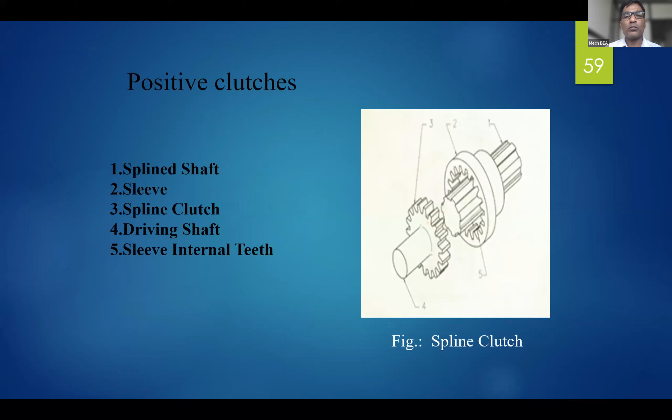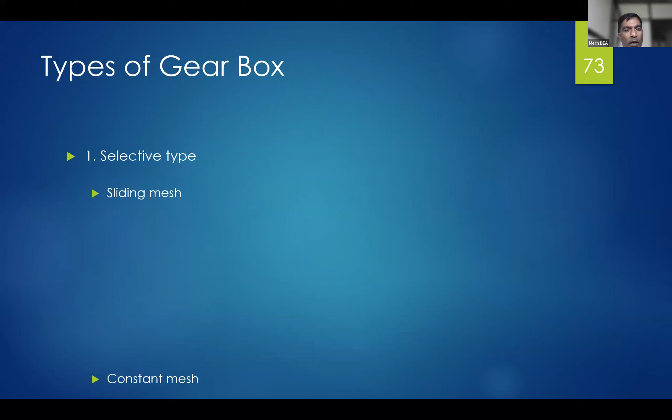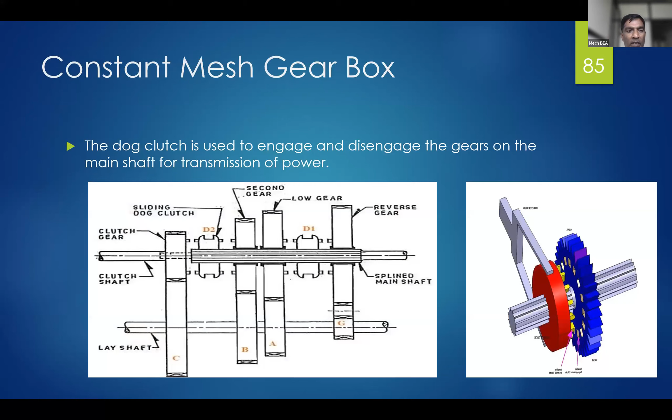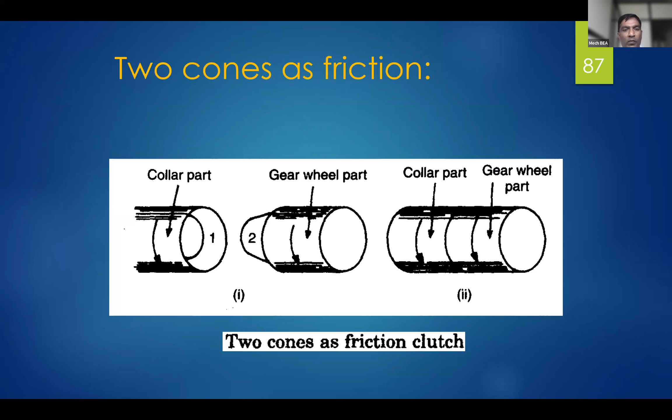So, we are going to see the remaining part of this unit. First of all, I will revise some of the part. We have seen types of gearbox: sliding mesh, then constant mesh, and constant mesh with synchronizer, that is nothing but the synchromesh gearbox. This already we have seen.

Then the next part that we have started is the overdrive. With respect to overdrive, we have seen how it is constructed and what is overdrive. It is a device in an automobile which is connected in between the gearbox and the propeller shaft to provide an additional speed for the propeller shaft.

With the help of an epicyclic gear train, it is possible to fix one of the elements in the epicyclic gear train, which is in the form of sun and planet gear in the overdrive. We can have overdrive by rotating the output shaft more than the speed of the input shaft to this whole assembly. So that is nothing but the overdrive.

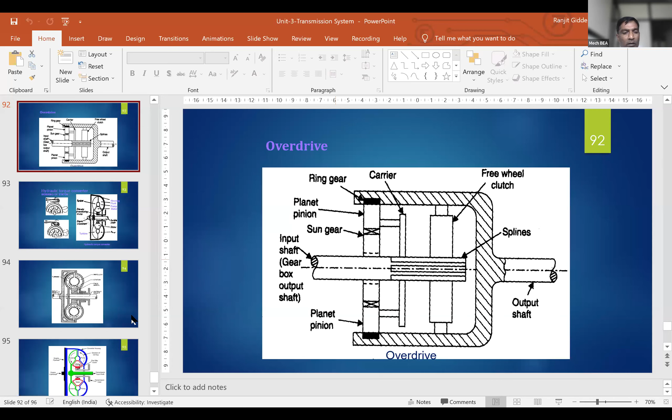In theory of machines, we have seen the epicyclic gear train. So I will take one extra slide to give an idea about how we can rotate the output shaft with a speed more than the input shaft.

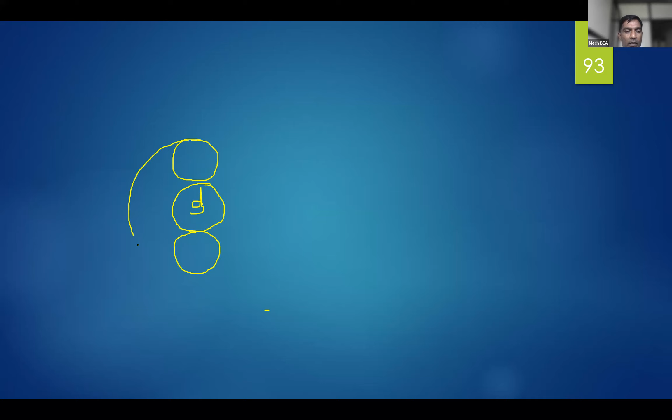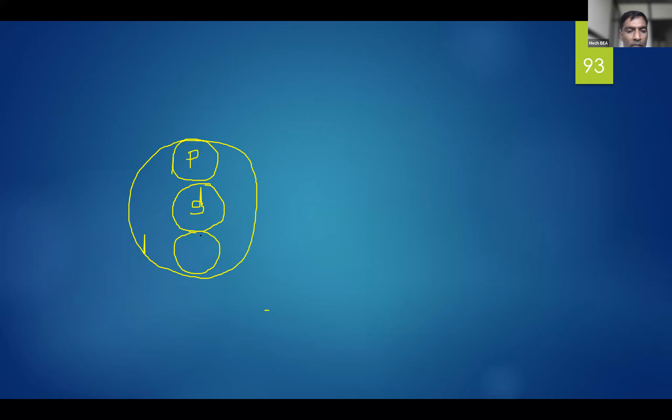So this is the sun and planet gear, epicyclic gear train. This combination we are going to check. The sun gear is mounted on the input shaft, and the sun gear is in mesh with the planet pinions, maybe 3, maybe 4, and those are mounted on the carrier. This arrangement is provided like this.

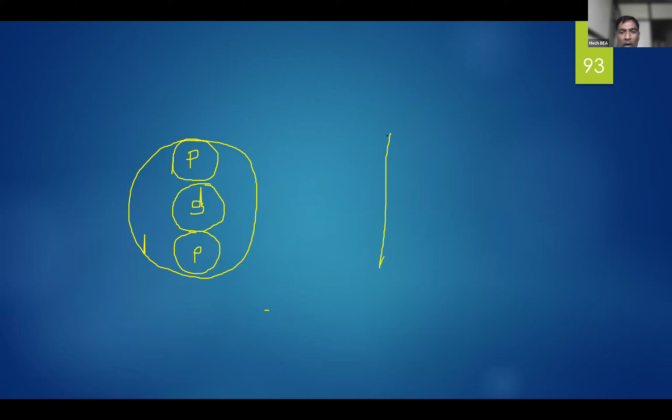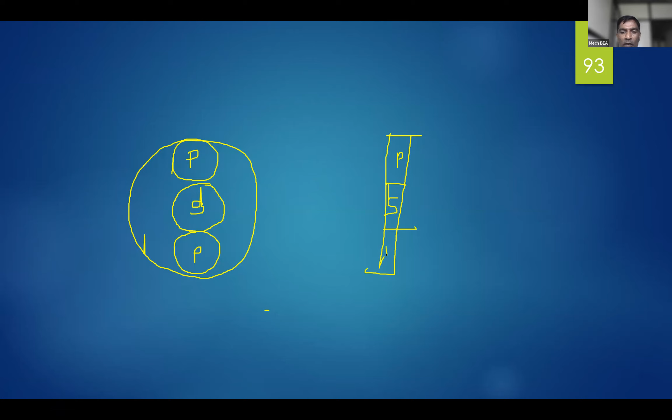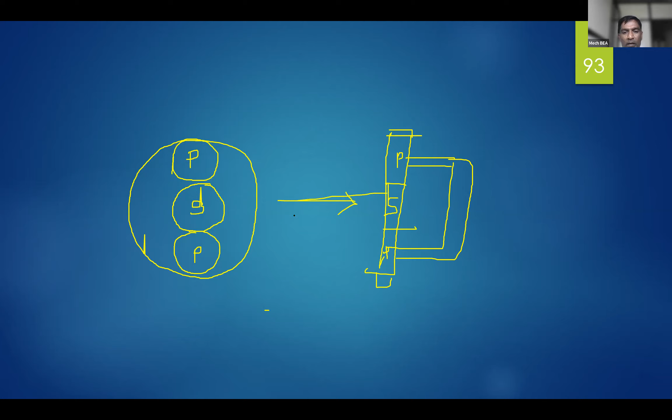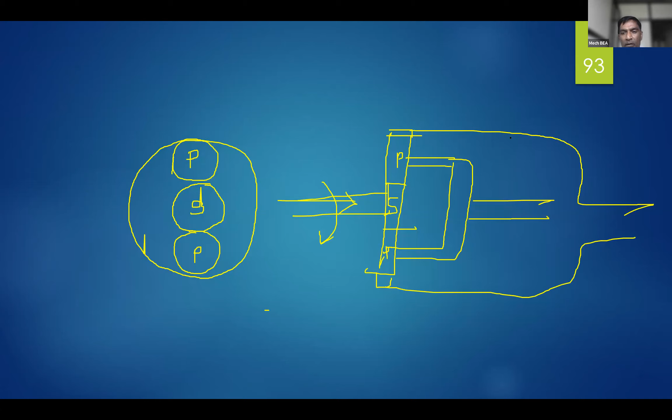In the side view, as we need to see how speed is increased, we need to go in detail with respect to this overdrive. This one is the arm, or we can call it the planet carrier. Now you can relate this diagram. Here is the input shaft, and the output shaft is connected to this casing. Here another arrangement, a free wheel, is provided. The input shaft is connected to the sun gear.

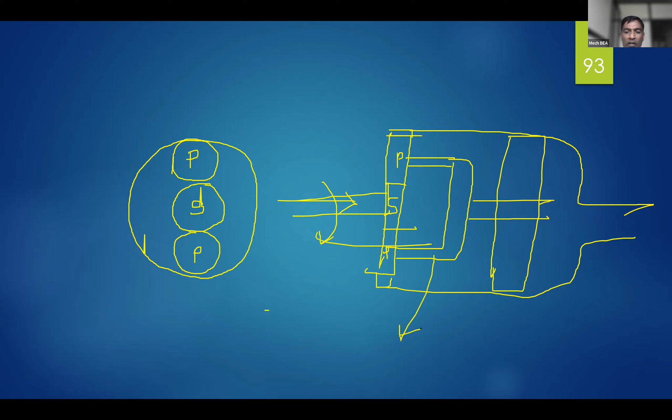Now, when this ring gear is going to rotate: generally while dealing with numericals on the epicyclic gear train, we have seen the arm is fixed. Like that, you should consider this one as the arm, and accordingly we have made the table of motion. This we can call the A gear. I will write here A, and here it is R. Already we have seen these types of numericals.

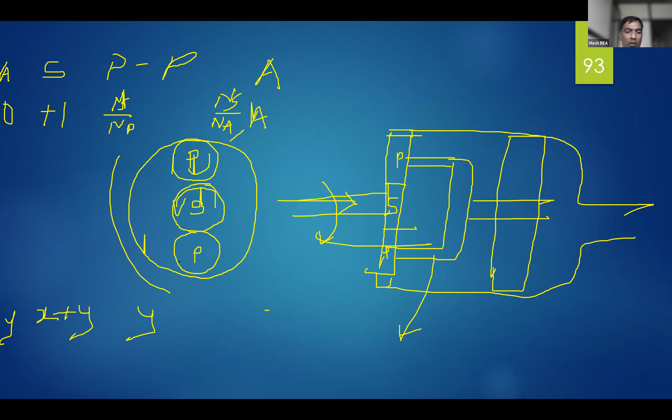Here NS upon NP, and here NS upon NA. Like this we get the first row, and finally we add Y as a rotation for the arm, and we get X plus Y. I am writing directly Y. If this is rotating anti-clockwise, this will rotate clockwise. So Y minus X NS upon NP, and for this Y minus X NS upon NA. This is internal meshing, so whatever direction of rotation of P, the same will be given to A.

Now, for one revolution of the sun gear, what will be the revolution of the ring gear? If for one revolution of the sun gear the ring gear has more rotation, then we say it is overdrive. That is, if the input shaft has 100 RPM and this rotates with more than 100 RPM, we call it overdrive. The principle of superposition is used as per the requirement. Either the casing is keyed or the arm can be fixed; there are different drive modes. Through this we obtain a speed, which we call overdrive with respect to input to output speed.

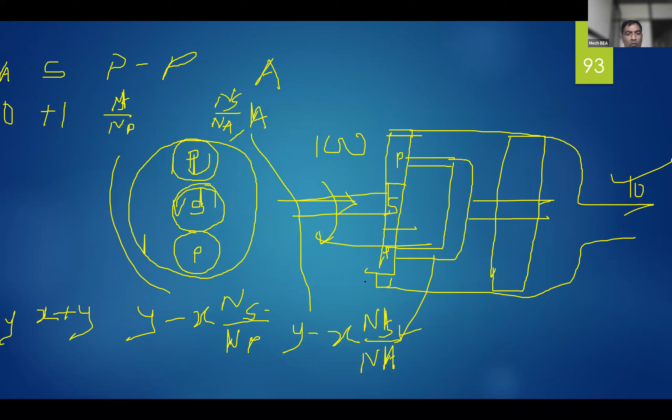So like this overdrive works, and it is provided on automatic transmission vehicles, wherein we can have cruise control or better fuel economy. So this is about one of the devices.

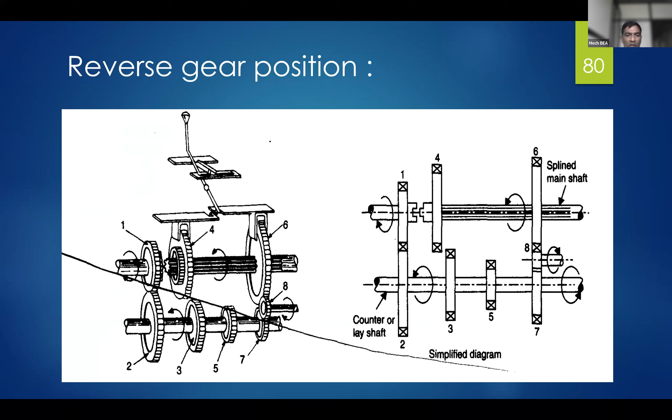Then the next important component of the automatic transmission system. Generally we have seen there is the manual transmission system and the automatic transmission system. Once again I will show that summary regarding the manual transmission system and the automatic transmission system.

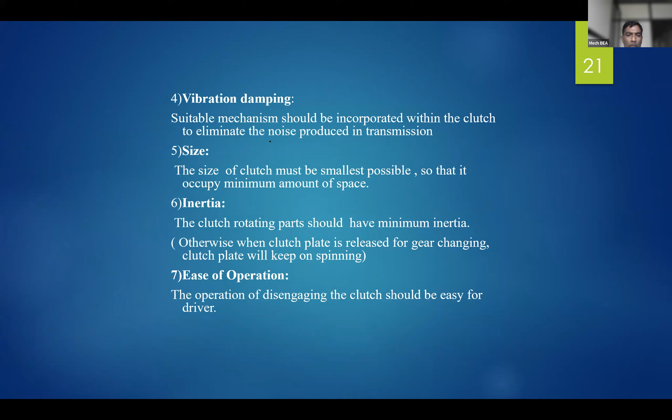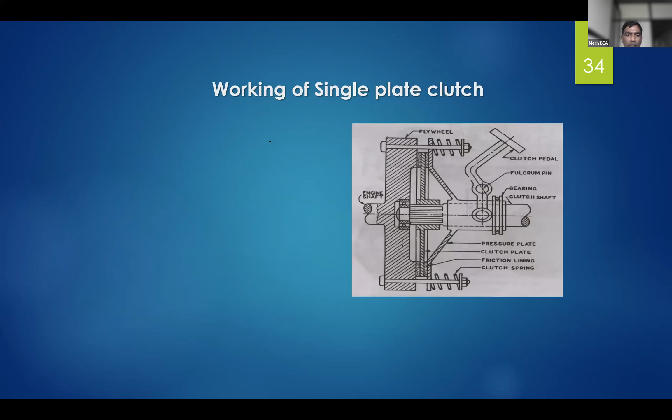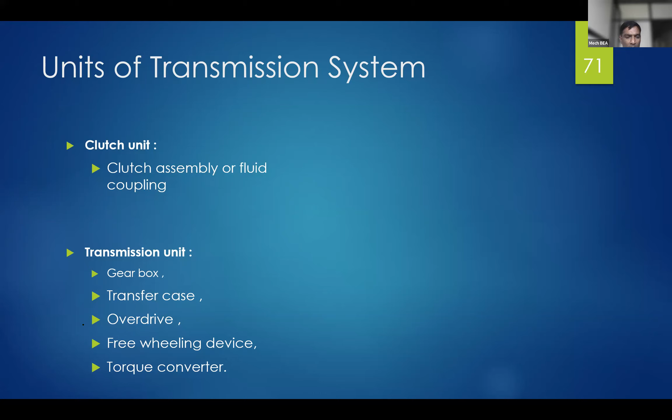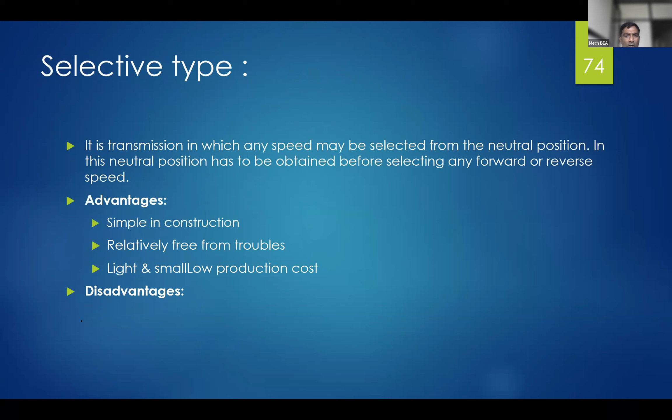So these are the units of the transmission system. Clutch is always required. In the manual transmission there is a clutch assembly. In automatic transmission there is fluid coupling. Again, in the manual transmission there is a gearbox, and in automatic transmission there is a torque converter. These are the additional elements required for both transmissions. Based on which transmission system is used, one or two elements are going to vary. Now you can see the image displayed on the screen, related to the hydraulic torque converter.

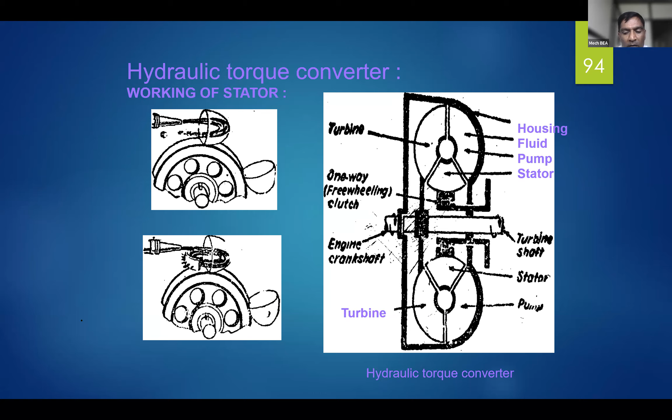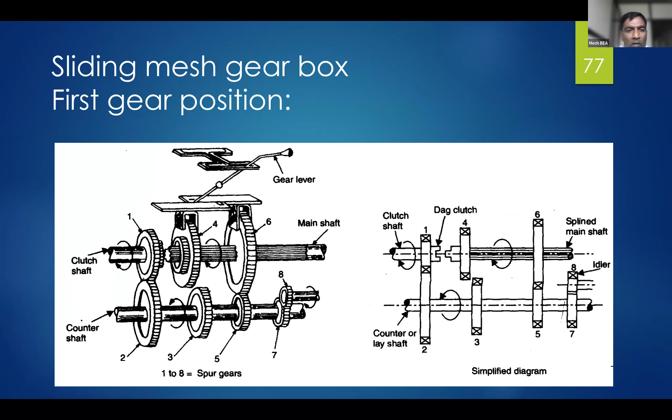Previously we have seen fluid coupling. On the similar ground it is also working, but in addition to that, one more element is provided, and that element is called the stator, which can be used to guide the oil. So you can see this, this is the torque converter.

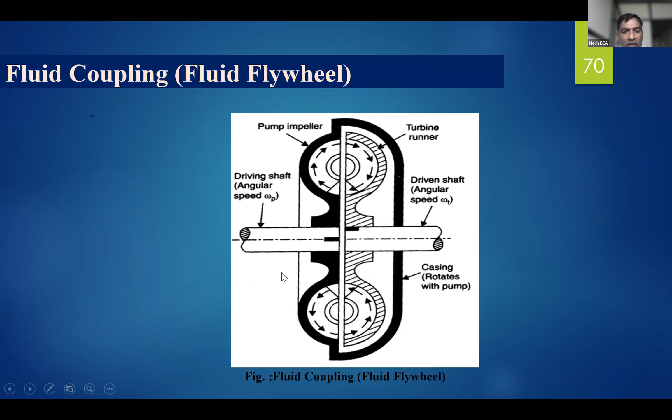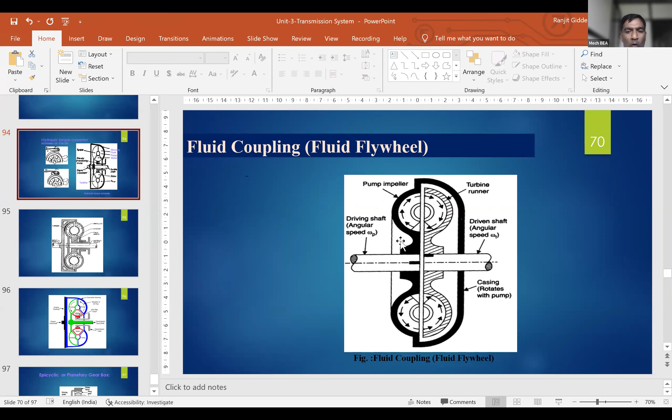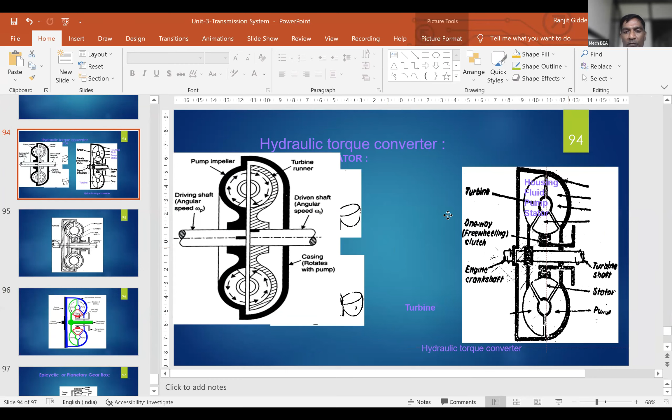I will put this figure on the same slide so that you will get an idea about the difference between the fluid coupling and the torque converter. My voice is audible? Somebody should respond.

Yes sir, okay. So this is fluid coupling, and here is another device which is part of automatic transmission, called the torque converter. That means there is multiplication of torque, and because of this multiplication we can have larger torque, which will fulfill the requirement of the transmission system.

This left hand side image is related to the fluid coupling. Whatever working the clutch does, the same connection and disconnection is done by this device in the form of fluid coupling, wherein there are two parts: one is the pump impeller and another is the turbine runner. This pump impeller is part of the casing. So for the fluid coupling there are two parts.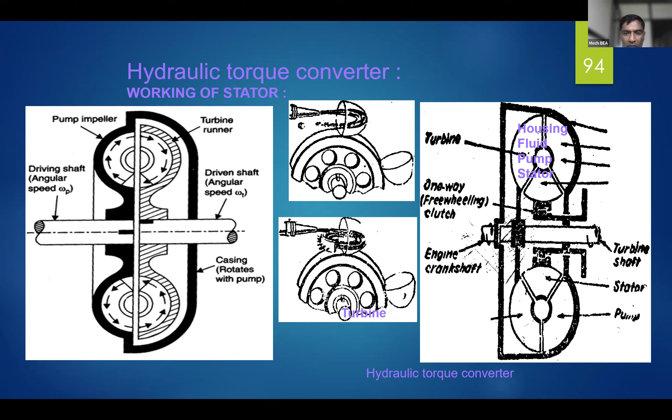So this is an element which is used in the automatic transmission system.

Here is one more figure you can check. So here this is the impeller, this one is the stator element, this is part of impeller, and this one is the turbine. So this is input shaft, this one is output shaft. Aim is to connect this input to this output shaft.

How to connect? With the help of the fluid, which is provided inside this impeller. So because of the flow of fluid, it will rotate this turbine, and after rotation, whatever fluid is remaining, again it is guided and provided to the impeller via this stator. So like this all the time.

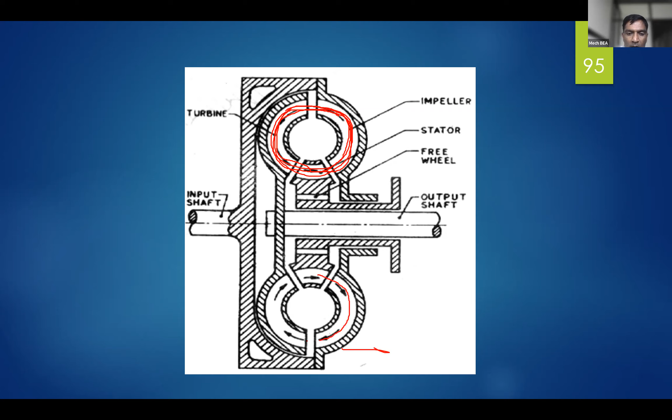As soon as the accelerator works, it will multiply the torque like this, and this will rotate the output shaft. So the function of this stator is to guide the flow, which will help the turbine to get more speed.

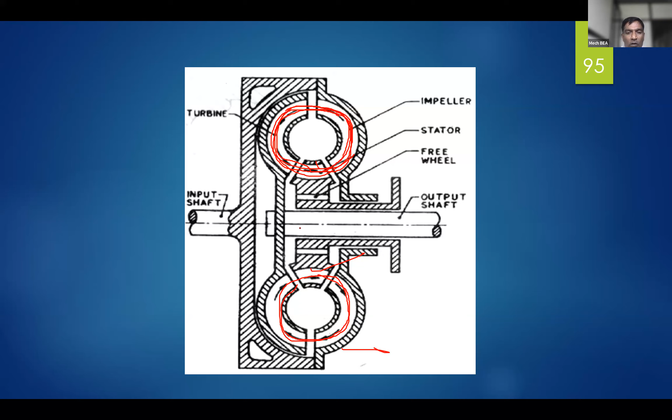So this is about the torque converter. In the fluid coupling, there are two components, and in case of the torque converter, there are three components. Additionally, one stator unit is provided, so that it will multiply the torque. Simply, this torque converter is also called a torque multiplier.

So instead of a gearbox - a gearbox is required to vary the torque as per the requirement. So the torque converter is also required to vary the torque. So in automatic transmission, this torque converter is there.

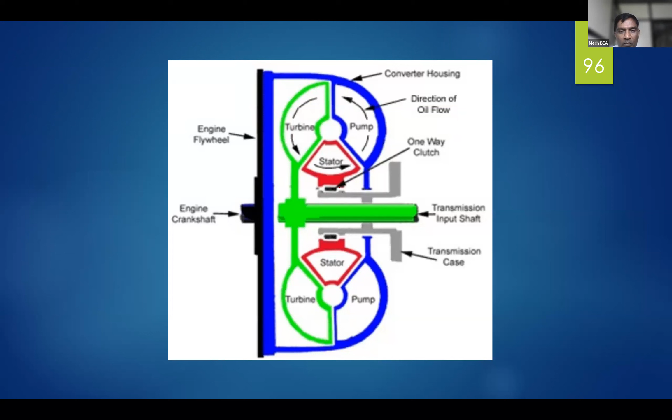Okay. Then the next component of the automatic transmission system is nothing but the epicyclic or planetary gearbox. So whatever way we have seen that overdrive, the same thing you can take as an example of epicyclic gear train or gear set.

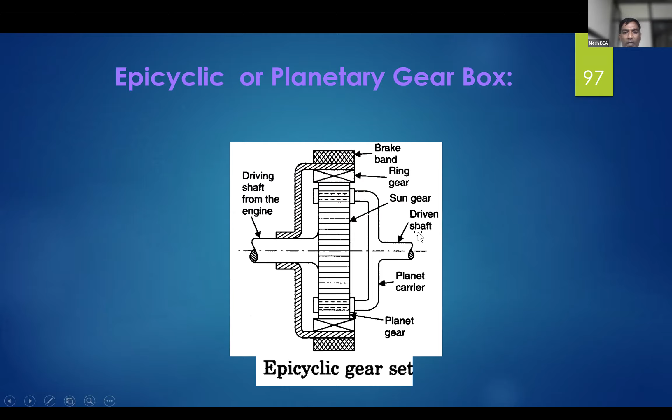So in the automatic transmission, such sets are provided, based on the requirement of how many speeds we need to provide for a particular vehicle. So this is one combination.

So we can eliminate this part, and this is for one ratio, this is for another ratio, and 3, 4, 5 like this. So this combination - for one speed, there is a combination of sun gear, planet gear, and ring gear.

And what you are observing, this one is the brake band. So in the epicyclic gear train, either for tabulating the data we fix the casing or the ring gear is fixed. But in actual practice, as per the requirement of speed, one of the gears we are fixing. So here, to fix the ring gear, a brake band is required. Again, the sun gear can be fixed to the casing, but the ring gear can be fixed by providing the brake band.

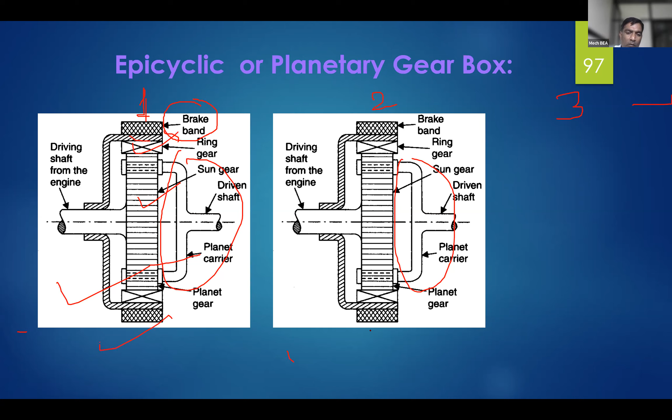So this brake band is provided to fix the ring gear, and accordingly we can get the speed. So such combinations are provided in the automatic transmission, and that will give various speeds.

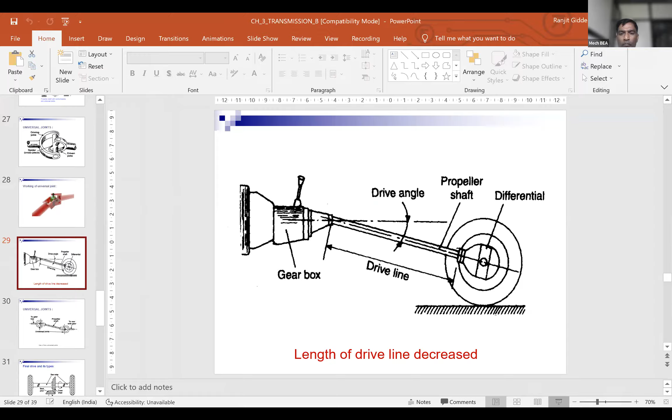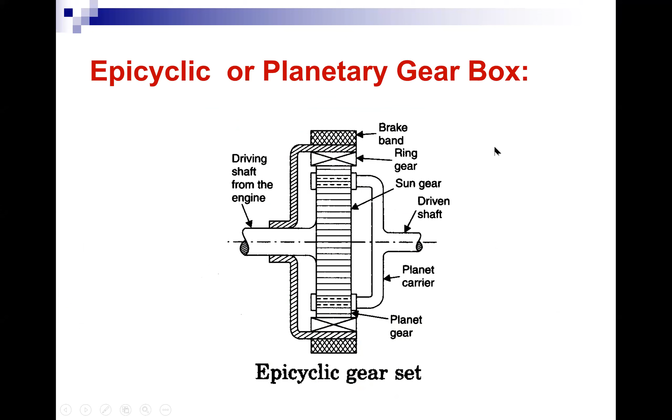What is the topic on the slide, Milind? Propeller shaft. Okay, good. So this is about the epicyclic or planetary gearbox, which we have already covered.

The next important component is called the propeller shaft. The engine is placed at the front, and the transmission system has to rotate the wheels which are provided on the rear axle. So after the engine, there is a clutch that connects and disconnects power from the engine to the transmission system.

After the clutch, there is the gearbox. After the gearbox, in automatic transmission or in some vehicles, there is an overdrive. And after the overdrive, there is the propeller shaft. So the propeller shaft is used to provide power from the gearbox to the final drive.

Let me draw one schematic diagram here. This is the engine, and here is the wheel, and how to provide...

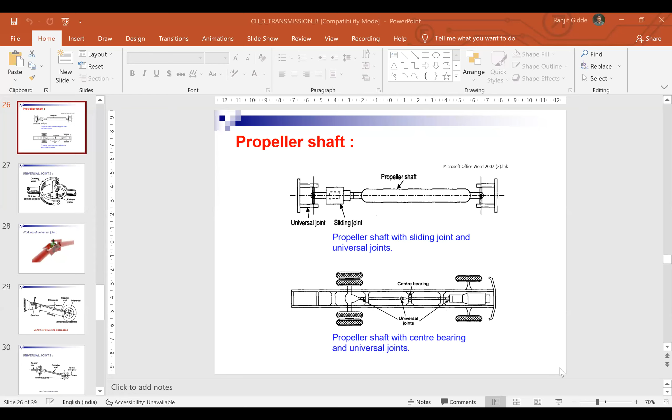So we were discussing about the propeller shaft. As power is available at the crankshaft, and with that power, the wheels need to be rotated, which are mounted on the rear axle. So how to connect that? For that, a clutch, gearbox, then the propeller shaft and final drive are required.

So this one is the propeller shaft. At one end, there is a universal joint, and at the other end, a slip joint and the universal joint. And in the middle, there is the body of the propeller shaft. You can see the animation.

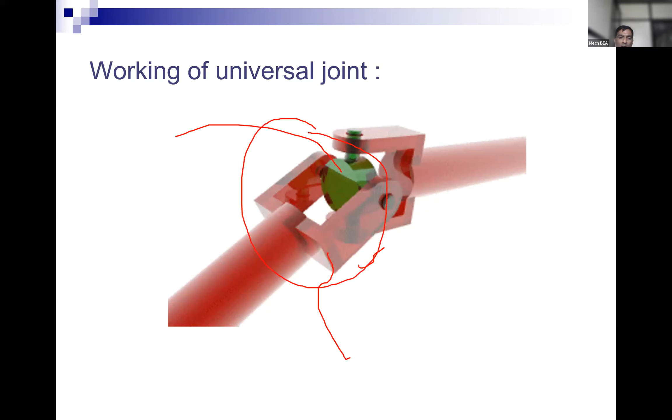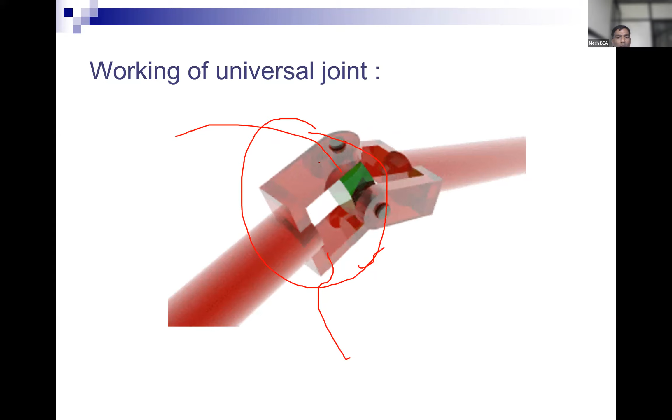This one is the cross, and this is the yoke. So such a component is attached, you can compare these two. The spider is provided in the middle with two yokes. One is the driven yoke and one is the driving yoke. So this one you can call driving, and this one is the driven.

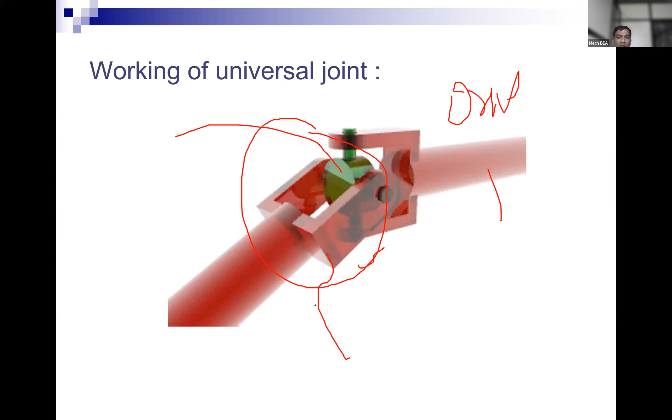This propeller shaft along with the universal joint can be used to transmit power having an inclination with respect to the horizontal of around 30 degrees. It should not be more than 30 degrees; less than 30 degrees it can be used. More than that, it is not possible to transmit constant speed. So whatever speed is available at the output shaft of the gearbox is not provided the same at the input of the final drive. For more than that angle, constant velocity joints are used.

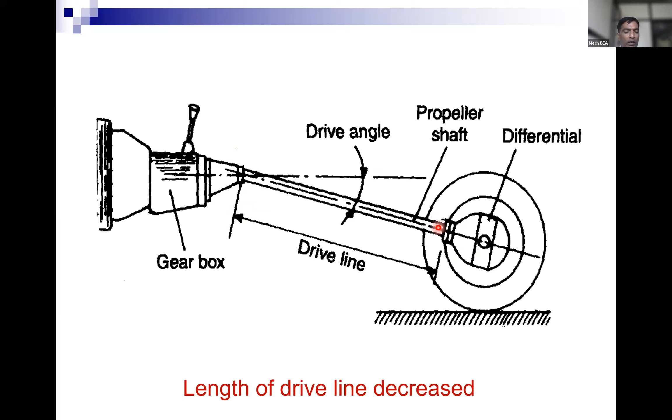So this is another image. This is the gearbox, this is the propeller shaft, and this goes to the rear axle gear, or simply the final drive. So here there are two universal joints.

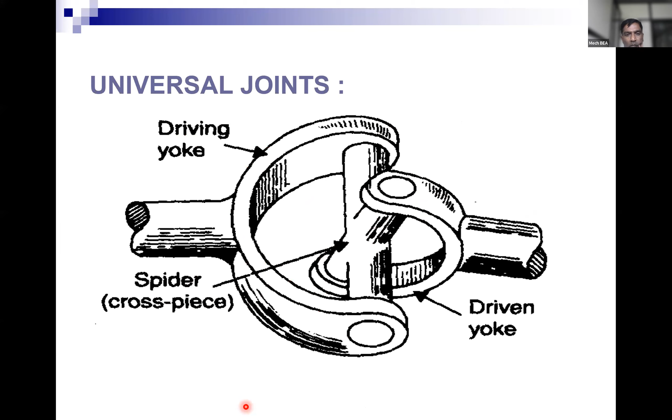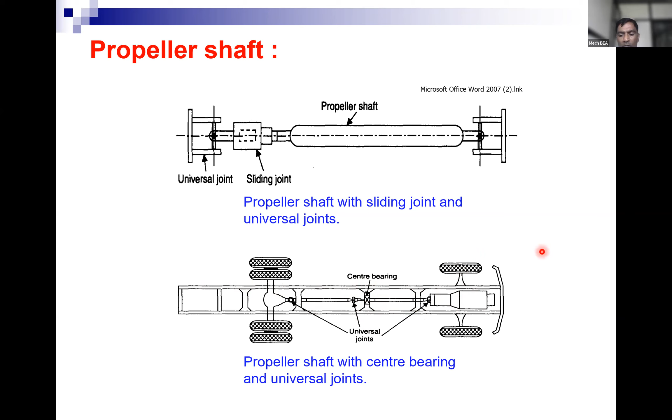So this is about the propeller shaft, universal joint and the slip joint. The slip joint is used to compensate for the increase or decrease in the distance.

Then next is the last part of the transmission system device. Thereafter, there is no change in speed, no increase or decrease in speed, and that's why it is called the final drive.

We have already seen the flow of power from engine, then to the clutch, then gearbox, then propeller shaft along the length of the vehicle, which needs to be diverted to provide power to the axle. So how to divert that, or transmit power at 90 degrees? For that, there is bevel gearing or bevel gear arrangement, and one such arrangement is the bevel pinion and crown wheel.